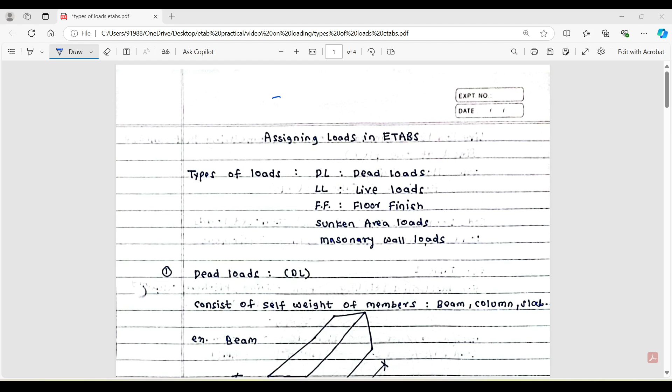I am not going to cover dynamic loads such as seismic and wind. So here I have one plan. If you see in static load in ETABS, we have to give first dead load, second is the live load, third one is the floor finish, fourth one is sunken area load, and fifth one is masonry load. I am going to cover each load one by one.

So first load is dead load. Let's go in ETABS and create a load case. Define load patterns - here you have to give the name dead load. Here you have to select the type dead, self-weight multiplier 1, and you have to add. For this case I will delete this. Now there is a dead load.

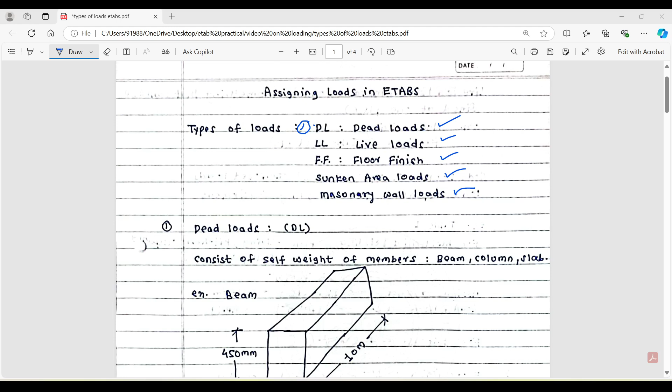So what exactly does dead load mean for ETABS? For ETABS, dead load means it considers the self weight. It consists of self weight of the members, like when you draw the beam, when you draw the column, when you draw the slab. If you have the dead load command, then automatically it calculates the self weight of the member - that is nothing but the self weight of your ultimately the structure.

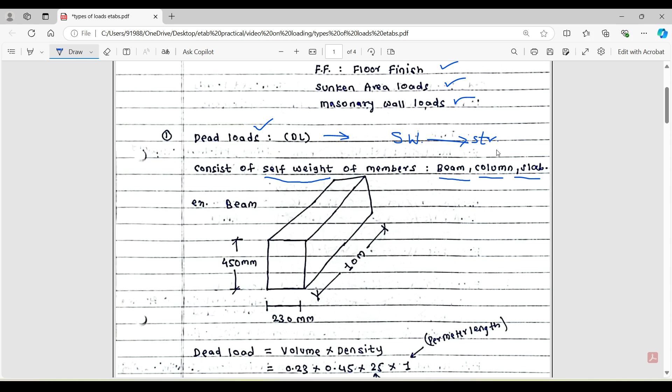So here I have given one example of how to calculate the self weight of the member. Here we have one beam. The span of the beam is 10 meters, width is 230, and depth is 450. So very simple formula is there for the dead load - dead load means volume multiplied by density. Here volume means width multiplied by depth, and we are calculating per meter, that's why the length we are considering is 1 meter, not 10 meter, into the density of the concrete or RCC which is 25.

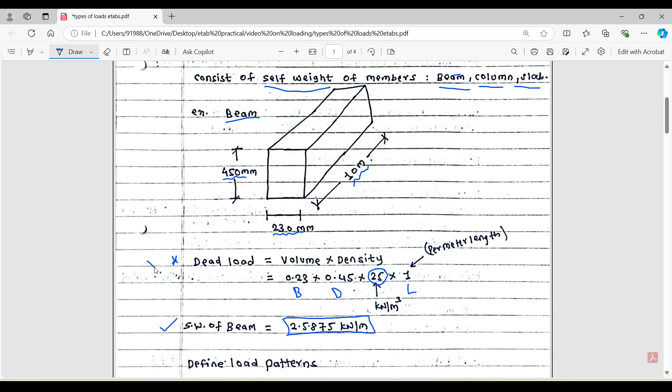So this is your self weight of the beam, which is 2.5875 kilonewton per meter. So in ETABS, when you draw these elements like column, I have drawn in 3D - you can see there is a column, slab, beam. So as soon as you draw and the dead load case is activated, then it calculates the self weight, and the logic or the way of calculating the self weight is what I have shown here. So this formula is used to calculate the dead load. Here if you see the dead load self weight multiplier is 1 - you can check the dead self weight multiplier is 1, that means it is considering the self weight of the structure.

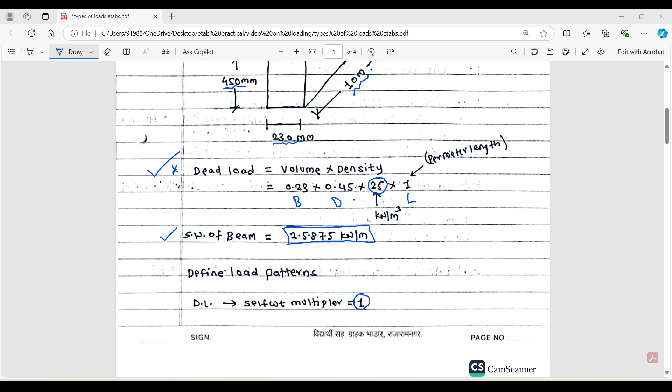Next, this part is very important. People don't know what exactly live load means in civil engineering. Generally live load means movable loads, something that cannot be fixed at one place - like human beings, they move from here and there. Furniture - tables, beds are there, you can rotate or change their position time to time, chairs are there, so many things are there. So all these things are considered under the live load category. So chairs, tables, beds, human beings, all these loads will be considered as live load.

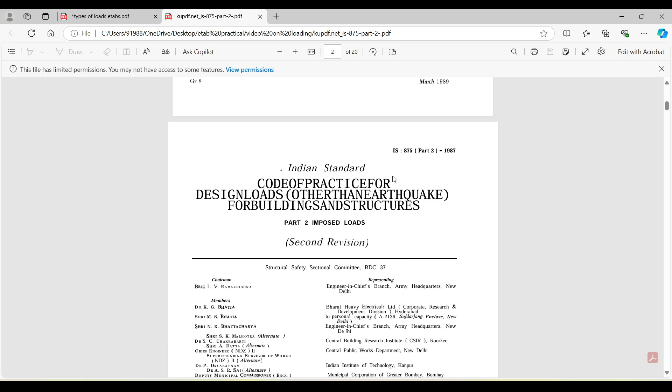Now if you see, we have to refer IS 875 part 2. I'm going to show you how exactly to look after the loads. So basically let's open the code first - IS 875 part 2. So this is the code of practice for design loads other than earthquake, IS 875 part 2, 1987. So if you scroll down, there is a very important table.

Table 1 gives imposed floor loads for different occupancies. This means the live load depends upon the occupancy.

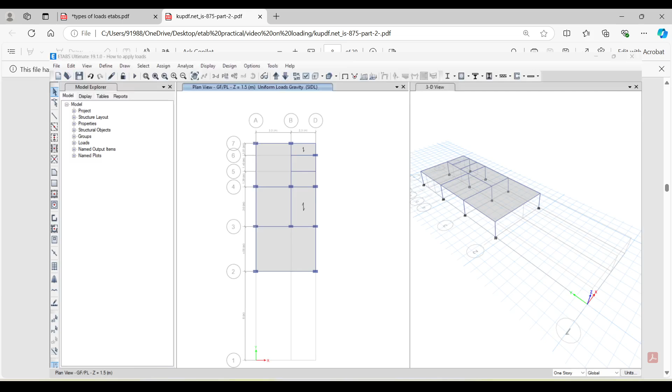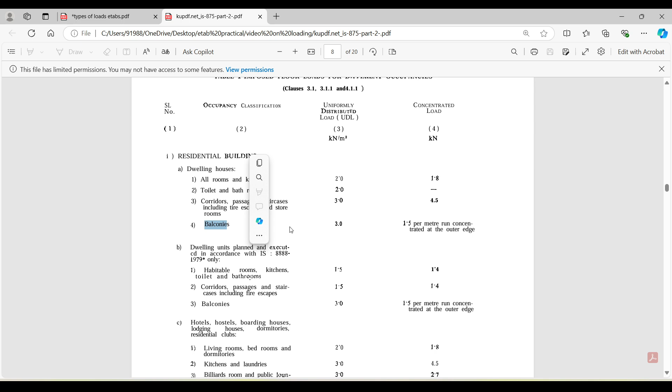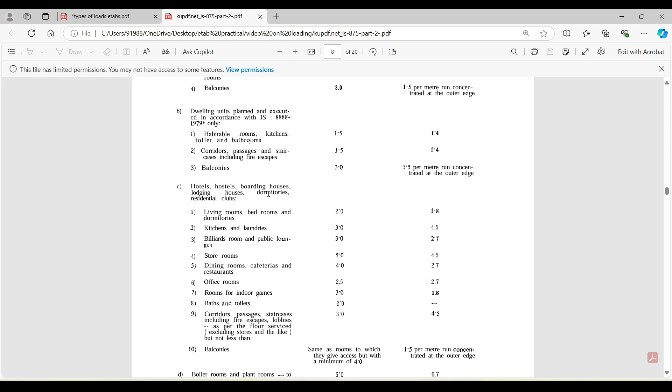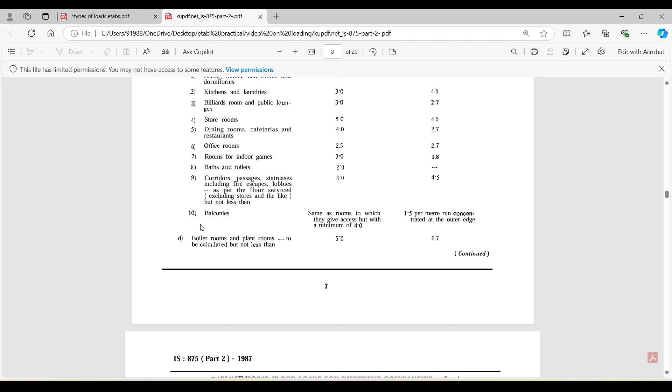The building I have drawn here is a residential building. For residential buildings, all rooms and kitchen require 2 kilonewton per meter square floor load, toilet and bathroom also 2 kilonewton per meter square. Corridors, passages and staircase require 3 kilonewton per meter square live load, and balconies 3 kilonewton per meter square. Similarly, different types of buildings are given, like hotel, hostel, boarding houses, lodging houses, residential clubs, garages, educational buildings, institutional buildings, so many things are given. So as per the function of your building, you have to select the appropriate load.

So let's go in ETABS, go to define. We first define the live load case. Just enter the live load name, select the type as live, and add new load. Now your live load is added.

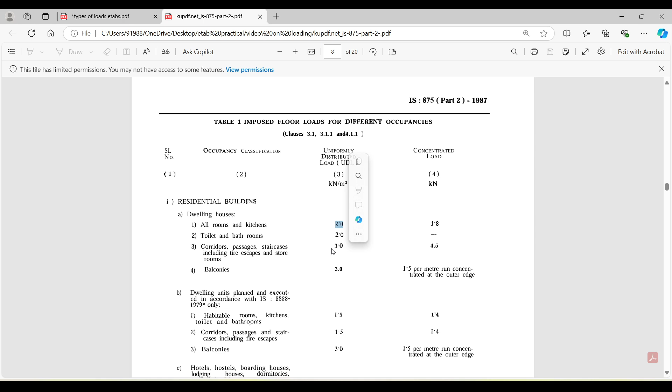Now, as I told you, my building is residential. So in a residential building, there will be either 2 kilonewton per meter square or 3 kilonewton per meter square load. From the architectural plan, I know that these are other rooms like kitchen, bedrooms, and this is my staircase. So I will select the floors first. I am not selecting the staircase here because it has 3 kilonewton per meter square load. The others have 2 kilonewton per meter square load. You will come to know this from your architectural plan.

So just go to assign, shell load, uniform. Here you have to select live. As per IS 875 part 2, my load is 2 kilonewton, and I will click apply.

Now this is my staircase, which I know from the architectural drawing. So I will select this and assign a load. Again, shell load, uniform, make sure it is live load. Now it is 3 kilonewton per meter square. Apply. Now you can see the intensity is 3. So it basically depends upon the occupancy.

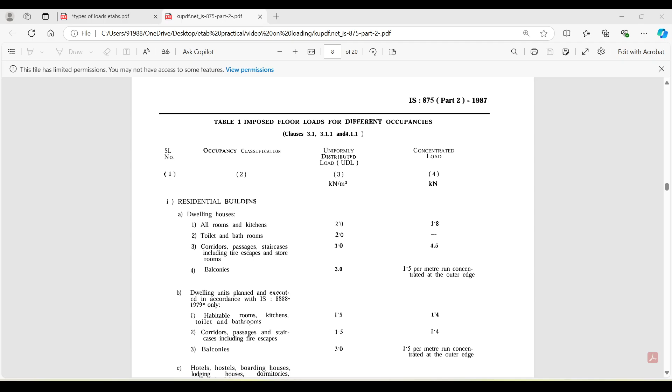Now your live load is clear. Now the third load is floor finish. So what exactly does floor finish mean?

After we cast the slab, suppose this is my slab, then what we do is fix the tiles on the floor, and below the tiles there is a mortar. So floor finish basically means the flooring load and the cushioning material. Generally this is a sand mortar bed, so it consists of sand, cement and tiles. All these things are considered under the title floor finish.

It basically depends upon which type of tiles you are going to use. Based on the weight of that tile, the load will change. In practice, engineers either use 1 kilonewton per meter square or 2 kilonewton per meter square floor finish. So we are going to use an average value, which is 1.5 kilonewton per meter square.

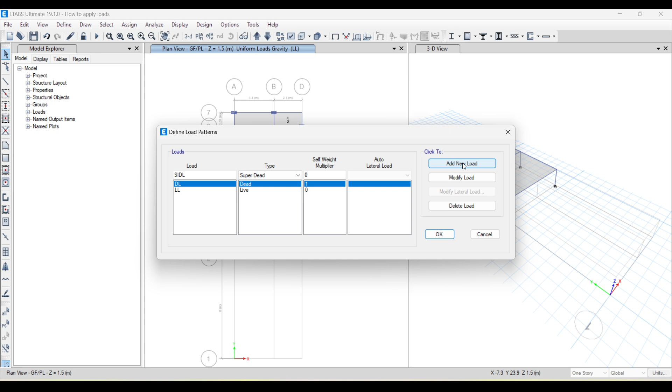So first go to load patterns. Here create the case superimposed dead load, type super dead, add the load, add new load. Now let's assign the load. First select all the slabs, go to assign, shell loads, uniform. Now make sure here you have the SIDL load pattern set to 1.5. Apply. Okay, correct.

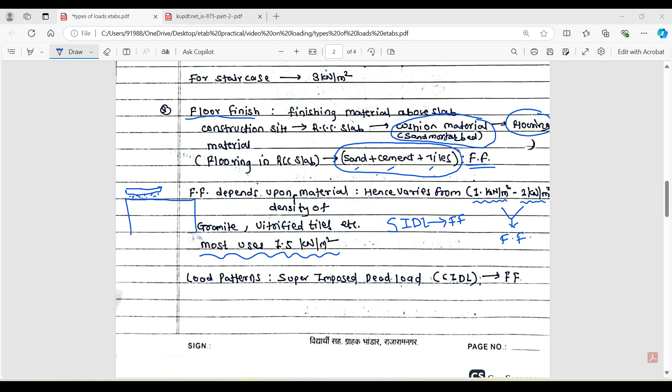So this is floor finish. Now again there is another load which is applied, called the sunken slab load.

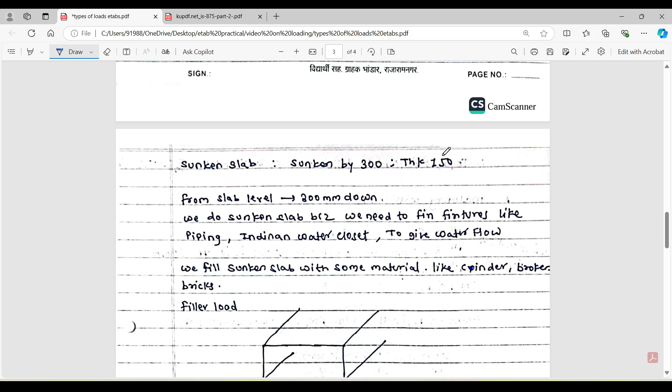What does this mean? Generally, if you have visited the site, the bathroom or toilet slab is lowered. Suppose this is the floor level, but due to different attachments related to plumbing, we have to fix the depth of this slab lower as compared to the regular slab. You can search on Google for sunken slab, and you will come to know, as different figures and pictures are available. So generally the level of this slab is lowered. Suppose this is my level, then the sunken slab level is slightly lower, and this is how it looks.

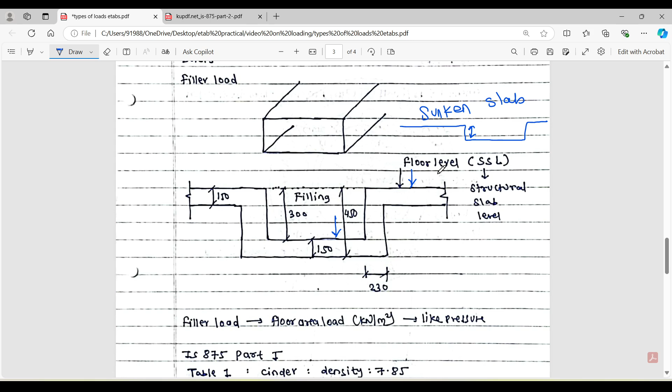So what we do here is fill this gap with materials. For that we use different material. Here I have taken one example, so the depth of the filling is 300. I want to fill up to 300.

Okay, so how to calculate the filler load? So it is a floor load, calculated in kilonewton per meter square. I know the depth is 0.3 and I want to calculate per meter square. So I have kept here 1 and 1, and the density of the material that you are going to fill, which may be broken bricks, surki, or cinder.

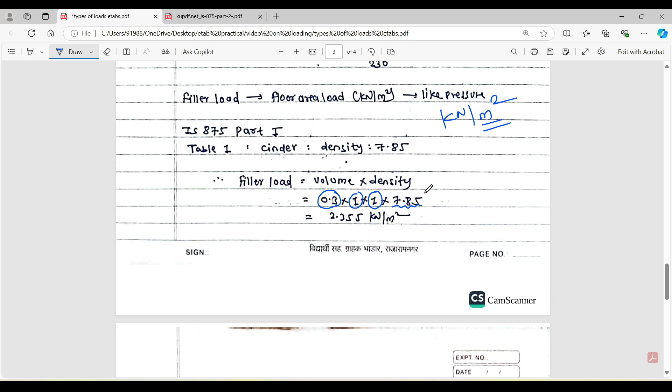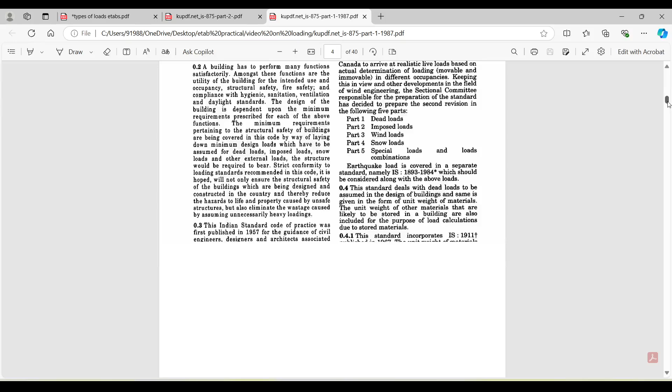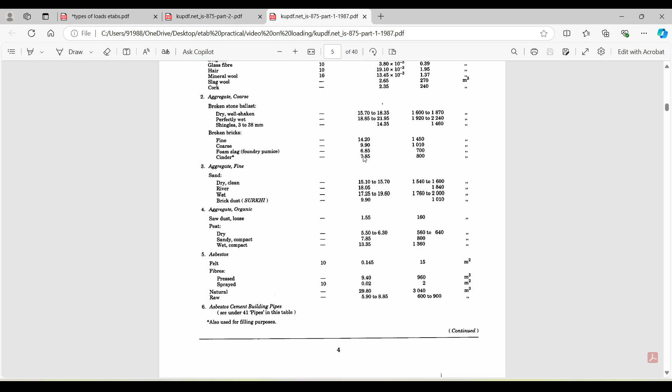So how will you get the densities? For that there is another code, IS 875 part 1, which deals with dead load. If you scroll down, you will get the unit weights of different building materials. As I told you, I am going to use broken bricks or cinder. The unit weight of cinder is 7.85. Similarly, you can check the unit weights of other materials also.

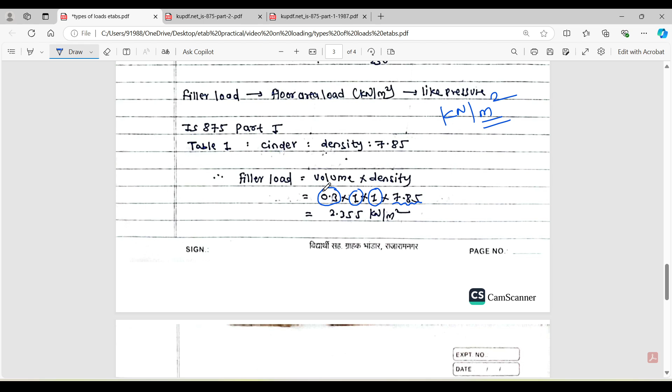So I will simply use 7.85 multiply by 1 by 1, meaning floor area per meter square, and 0.3 is the depth of the filling, since I want to fill up to this level. So this filling depth is 0.3. After calculation, it is 2.355.

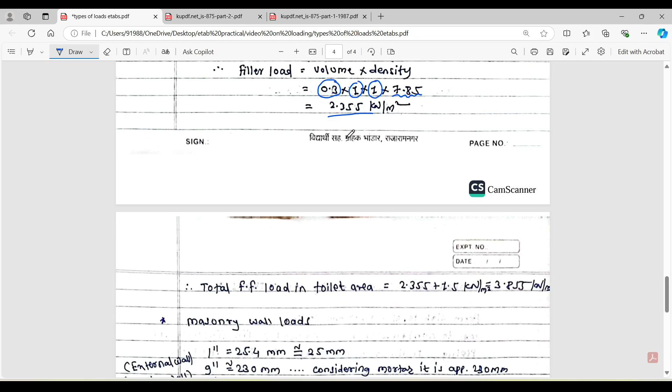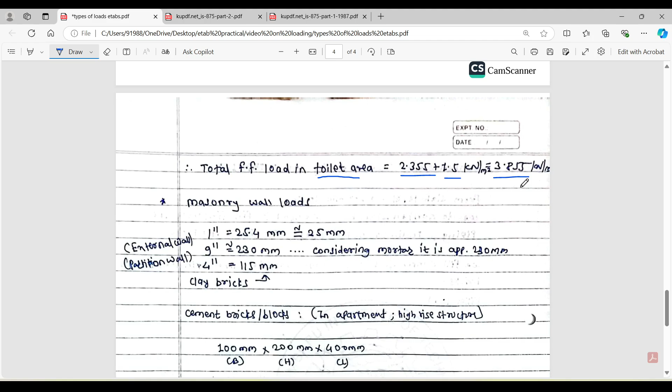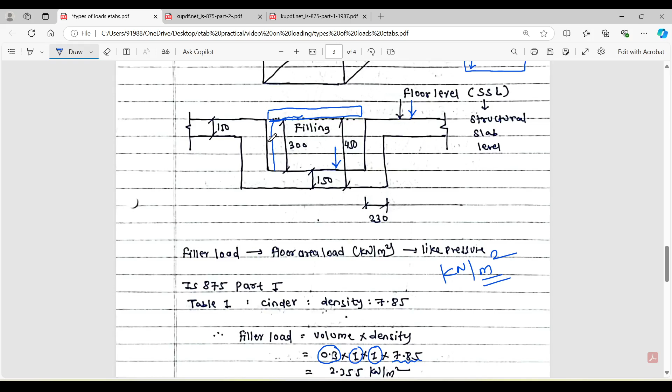So total floor finish load in the toilet area becomes: 2.355 is my sunken load, 1.5 is my floor finish, so total load becomes 3.855. Because after filling, I am going to fix the tiles, and also use filling material below the tiles. So I have to apply a load of 3.855 kilonewton per meter square.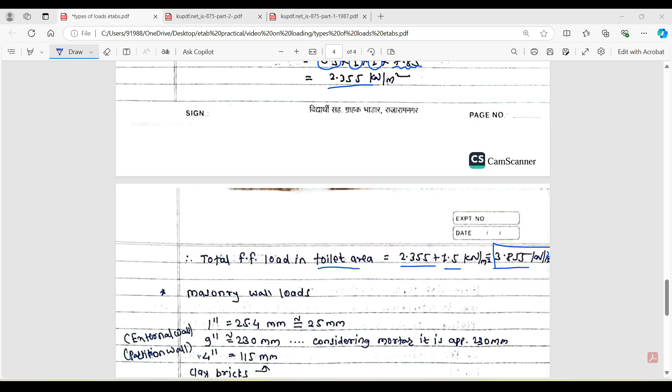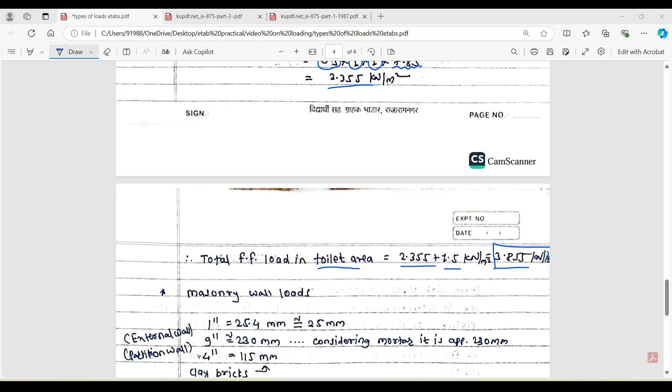So this is my toilet area. First of all, I will delete this load. Go to assign uniform load. First I will delete the load, because I want to apply 3.855. So select assign shell load uniform SIDL of 3.855 - I think that's correct. Apply.

Right, so this is how we apply the floor finish. The logic must be clear now. So what are the different loads you are going to consider in the floor finish?

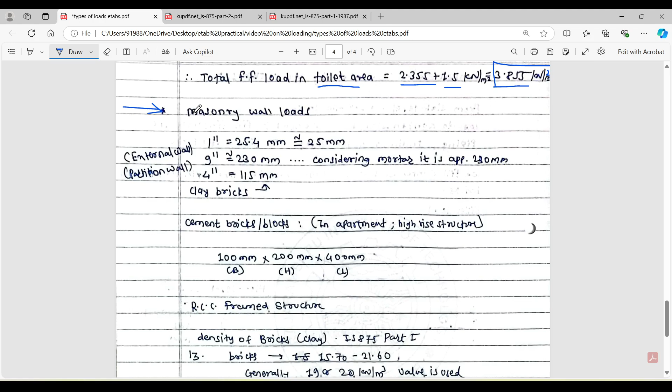Next, the last load we are going to discuss here is masonry wall load. Now this is very clear - suppose the floor to floor height is 3 meter, and the depth of the beam is say 0.45. So below this area we are going to construct our wall. So height of my wall will become 3 meter minus 0.45, meaning the actual brickwork will be of this height.

Okay, now how to calculate the wall load? I know the thickness of the wall, I know the height of the wall, and I want to calculate this per meter length, so I have considered the length as 1. And this is the density of the material, that is brick - you can get this value from IS 875 part 1, as I told you, there is a list of different materials and their unit weights.

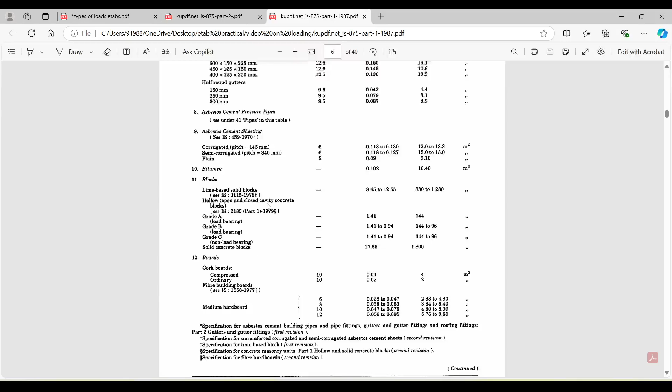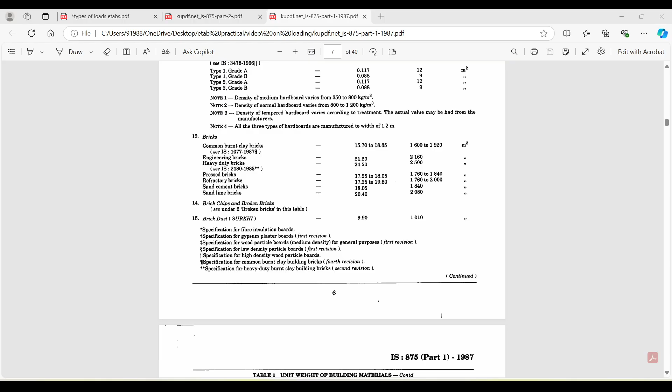So for bricks, you will find them somewhere around point 13, and you can see the different ranges depending upon the type of brick. Generally we use the value 20. So my wall load becomes 11.73 kilonewton per meter. This is for external wall, that's why it is 0.23. If it is internal, then the value will change. So 11.73 is for external.

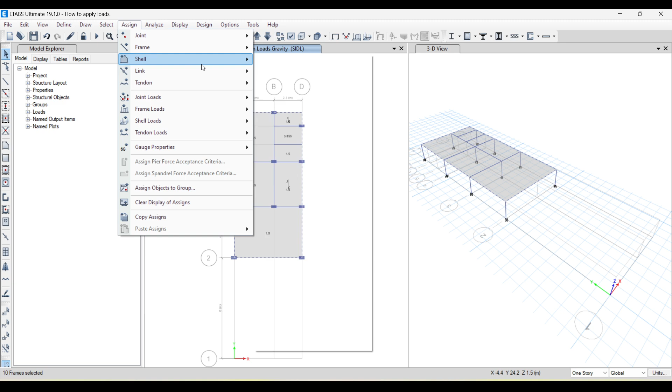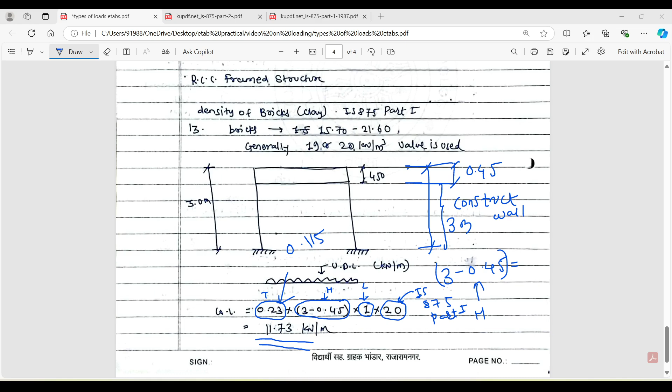So I will select the external beams, and then go to assign frame loads. Now it is a distributed load - make sure the category is SIDL. Again, we apply the wall load under superimposed dead load category, mention it in your notes. And it is uniform, 11.73. Apply. Now similarly you can calculate for the internal wall load and assign it on the internal beams.

I hope the loading part is now clear. I have shown you different types of loads and their meaning in ETABS. So this is how you apply the loads, and then you can replicate and change depending upon requirements - like if there's a terrace, then waterproofing load will be there, or some reduction in live load. So all these things you can do, but static loading is up to this.